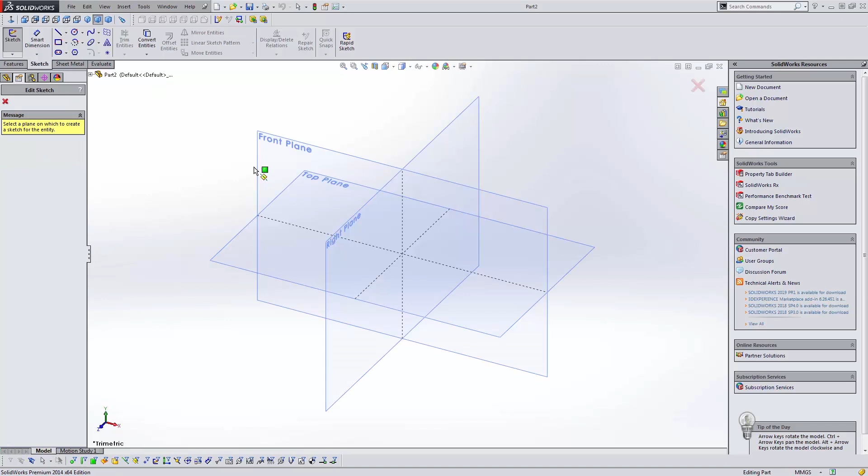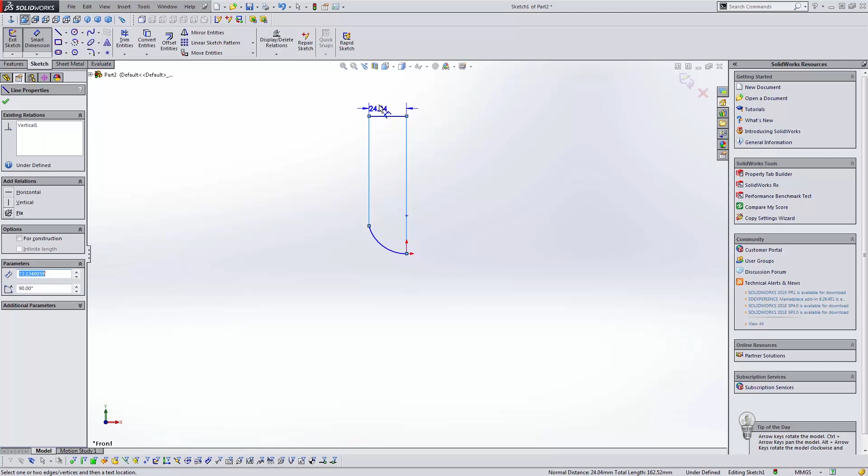I'm going to start with a sketch and just draw here a straight line up and down. This is going to be the axis it revolves about. I'll draw a line there, and that's going to be the center. So the diameter is 12 millimeters, so I need to go from here to here and put in 6, which is half of 12.

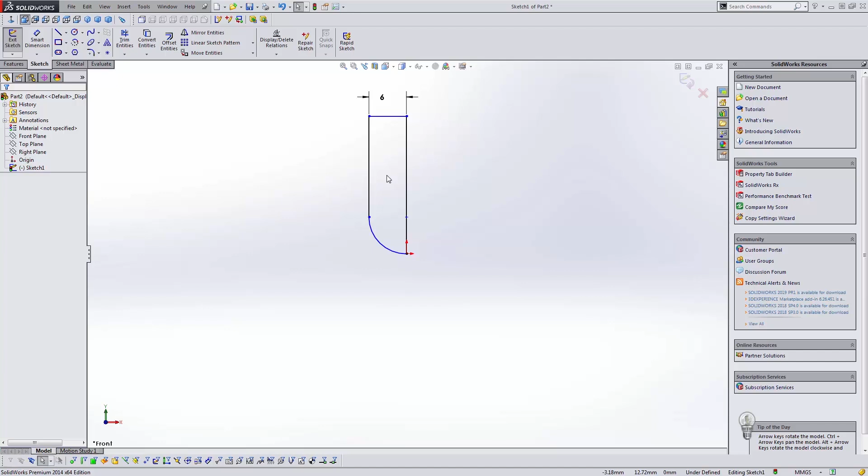I'm going to offset this line here, actually no, I'll use the shell tool to shell out that test tube. This arc's not going to be exactly right. I'm just visually using this in place when I design the other part so I can make sure they fit together. So you have your cross-sectional quarter view of this part, and after you draw your sketch, we'll just define this really quick so we don't have any blue in our sketches. Make sure everything's defined.

Exit the sketch, and we're going to choose Revolved Boss. While that sketch is highlighted, it's going to ask us what the axis of revolution is, or axis of rotation. We're going to pick this line here, and right when you pick that line, you can see already what it's going to do. It gives you some other options here, thin features. So if I want to make the thickness 1 millimeter, actually it's not going to work in this case because I would have to draw, actually I can delete off this line here.

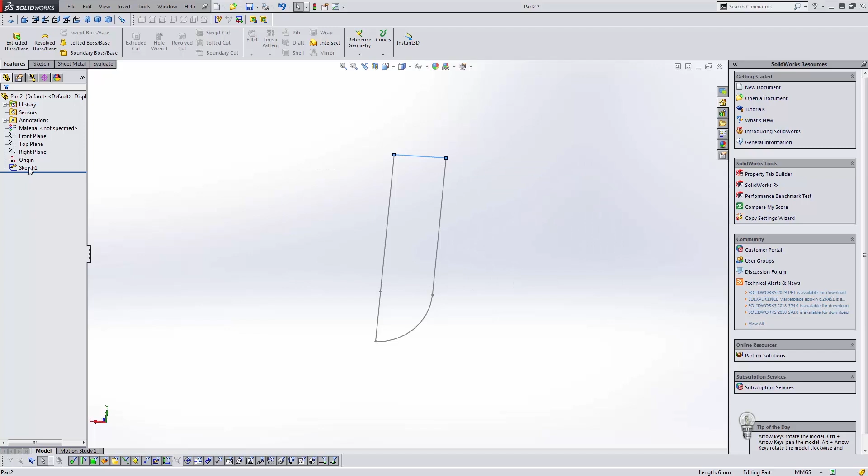Bring my errors over so you can see them. I actually don't want to delete the whole sketch. I want to come over here, edit the sketch, delete this feature off. I'm going to make this a construction line. So if you click on something, you can make it a construction line and it won't try to extrude it or use it as a feature. It's just there to hold the space for the dimension. So I called out the dimension on the construction line. It's holding that position and it won't interfere with the actual sketches that are going to do the extruding.

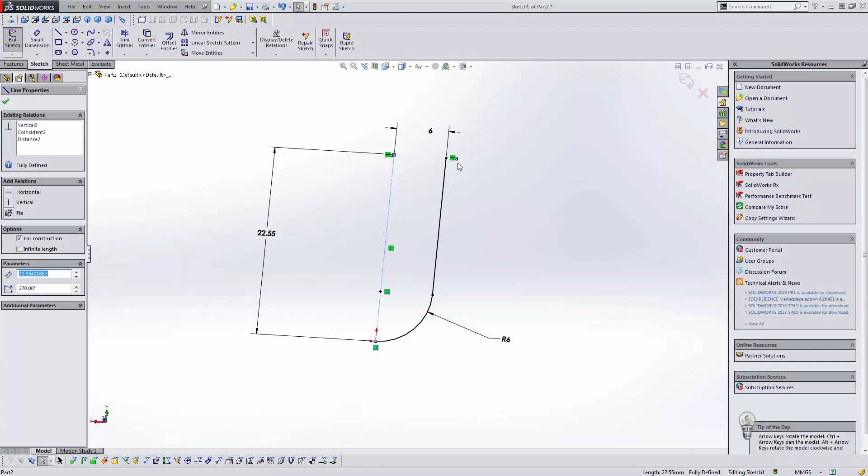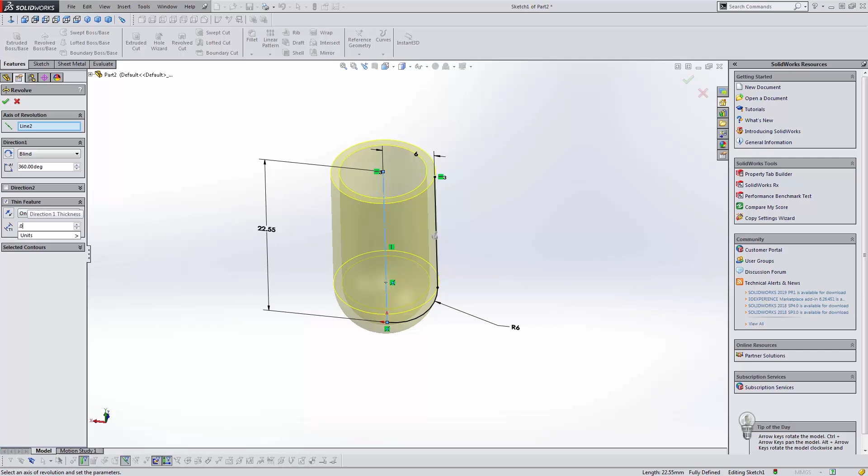So I'm going to do the revolve again. It says a sketch is currently open, meaning this is not closed. A non-thin revolution feature requires a closed sketch. Would you like the sketch to be automatically closed? I'm going to say no because I want it to be a thin feature. You can see here that I'm going to make the wall thickness 1 millimeter, or I can make it like 0.05 millimeters, just really thin. The glass is probably fairly thin on this test tube. So it's just another trick of skipping one step.

The other way we could have done it, and I'll show you that really quick, was closing out this sketch. Let me delete off this revolve, and we'll let it close it like it was trying to do. Sorry, I'm clicking around like a nut. Revolve sketch. Okay, it says it's open. This time we're going to hit yes. So when we hit yes, it's going to ask us what the revolution... I've got to close it off. Hold on. What are you doing, crazy sketch?

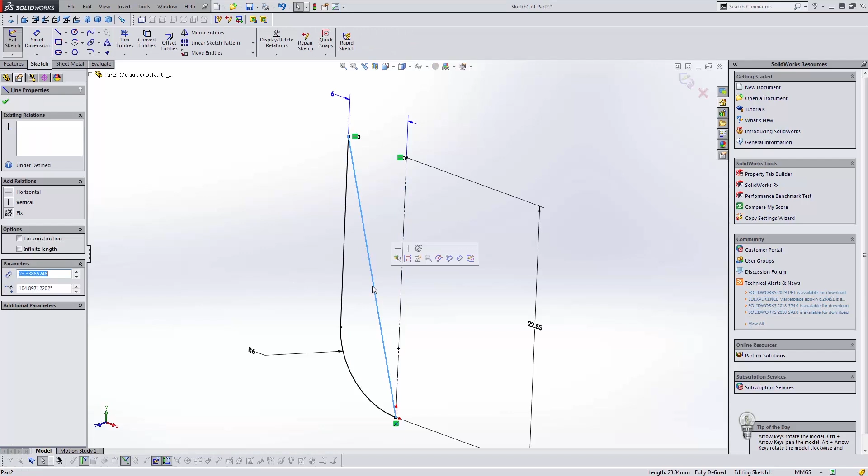Delete that. We're going to come over here, draw a line here. Now I'm going to do the same thing. Revolve, choose that sketch, hit yes, I'd like to close it. It's going to close that up and do the same thing there, except now we're going to have to shell this.

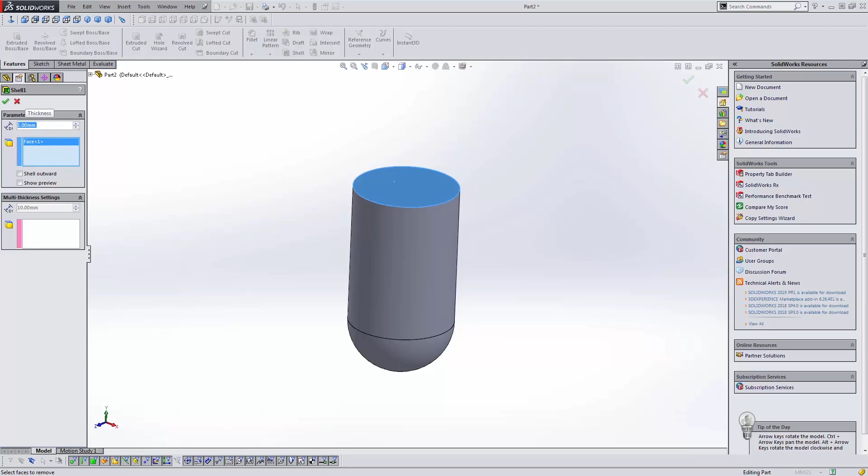So if you come up to your features, you go to shell, you're going to click on the top here, and you're going to say it's a millimeter shell thickness. And you're going to hit the checkbox, and there it is, or 0.5 millimeter. So you can right click on this feature, click on that little modification, and just do 0.5 millimeters.

So, you know, there's multiple ways to get to the final thing that you want to do in SolidWorks many a times. So we're going to save this, and we'll call it part 1 on the desktop. This is the worst place to save things. You can see I have all these junk folders and whatnot. So I'm just going to save it here, part 1, hit save.

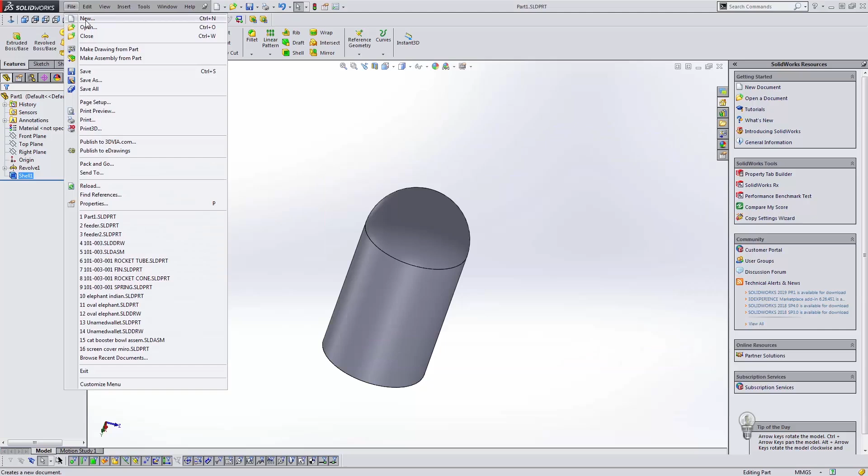So the next step is we're going to do a new part, and we're also going to use the Revolve again. And the trick to this is you always want to think of the object like a cross section of the object, and we're only going to draw half of it because we have to spin that shape around. And you don't have to draw in the center. Like if you want a hole in the center of this thing, you can start drawing over here out in space, and it'll revolve it around that and leave the center totally open.

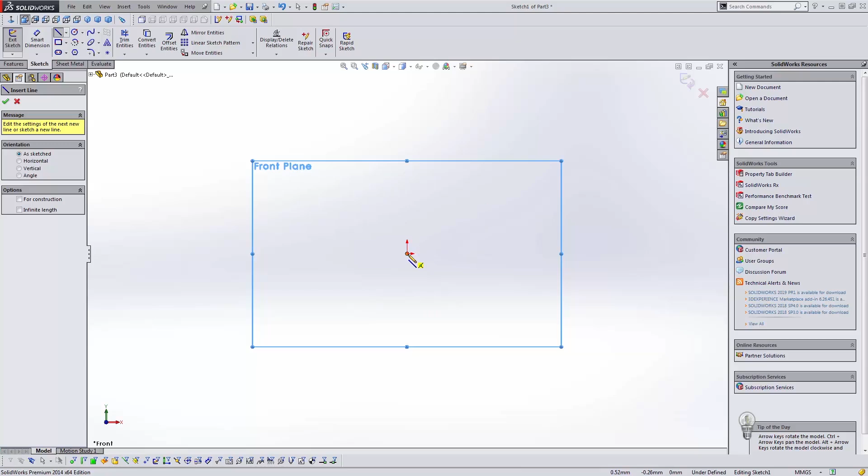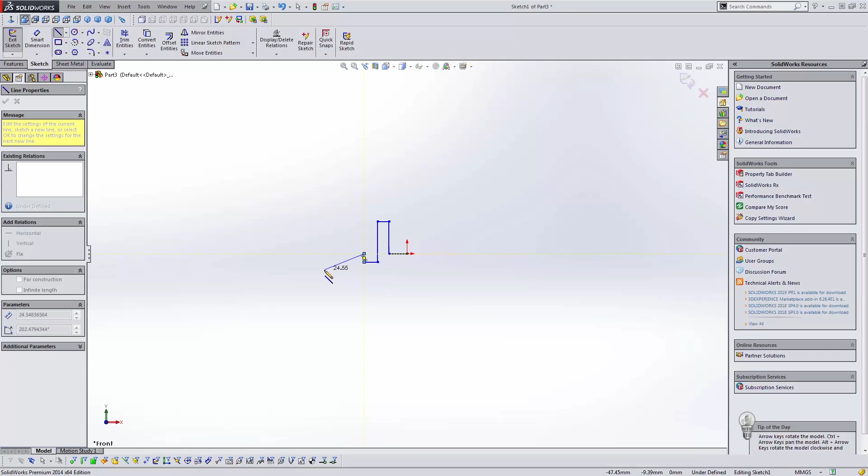But for this ant feeder, we want to make a hole for the test tube. We want to make a wall thickness for where that test tube is going to hold. We're going to also come down and make a little trough for the ants to come get whatever they put in here. And I want to make a little ramp for them to crawl up because I'm a nice guy and I don't want them to work too hard. And this whole thing will be closed off. So this is the base, and right there we're going to close that sketch.

So we're going to define some of these dimensions. So I have D as my dimensioning tool, and then it brings up the little dimensioning arrows, which is smart dimension. It also shows smart dimension D shortcut, but you can get to it up here. And there's also different dimensions if you want to do a horizontal dimension, a vertical dimension. Smart dimension just guesses for you. We're going to do smart dimension D. I'm going to click on it.

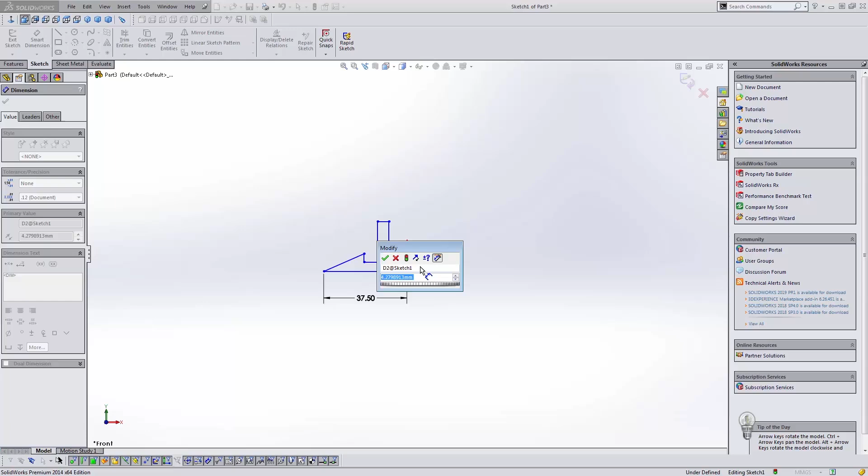Remember you're doing half of it. So if I want it to be like 50 millimeters total or 75 millimeters total, I'm going to use half of that. So I'll do like 75 divided by 2, make it about 3 inches wide. This thickness, I want to probably do about 1/8 of an inch. I'm designing in millimeters, but I can easily type in 1/8 and then inches there, and it'll convert it for me.

If I want to quit working in millimeters in this part, I can come down here and change the units to inches. It'll close off the sketch. You have to reopen it, and then now you're in inches. Sometimes it's easier to work in inches, depending on if you're used to it. I can work in both, so I'm used to working in either.

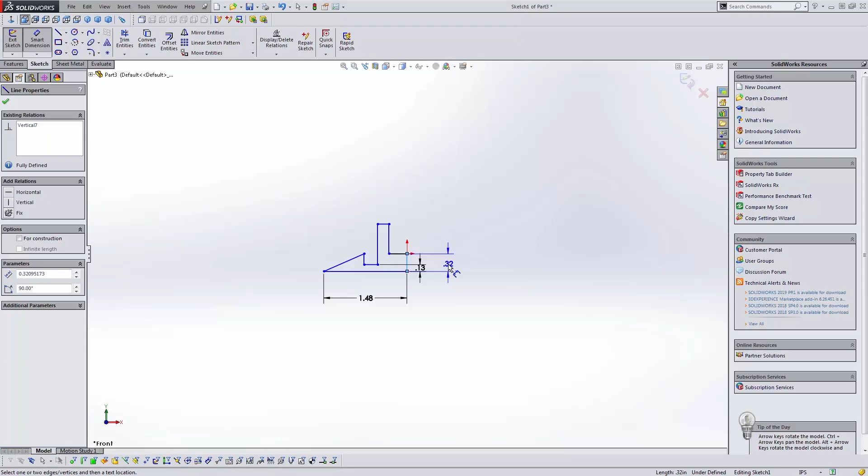That's an amazing skill to have. You guys should get that skill set.

All right, there we go. So I'm gonna make that 3/8 thick. This is where the test tube goes in, so it needs to be 6 millimeters to give me a 12 millimeter diameter. And we'll give it a little bit of play in there. So I'm going to do that in thousandths because I think tolerance is better in thousandths. So I'm going to give it about 5 thousandths total, about 2.5 thousandths on each side. So I just opened this up a little bit so that test tube could fit in there easier.

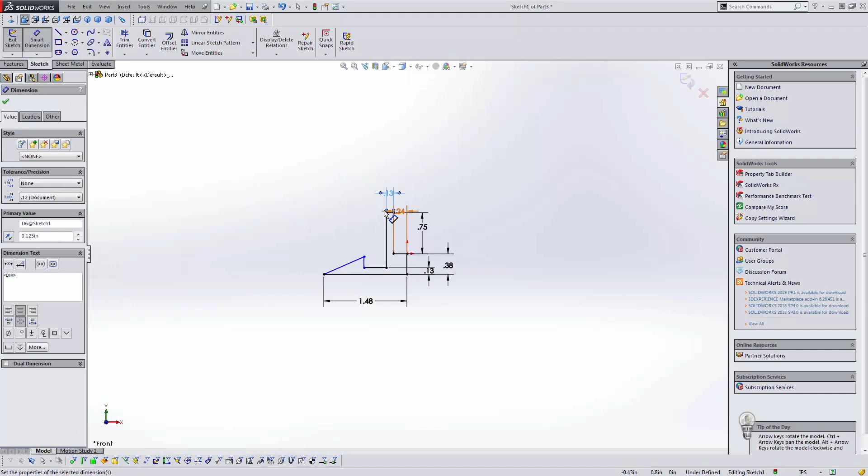I want about maybe 3/4 of an inch grab on that test tube. So that's the height there. And the wall thickness, maybe like 0.125. It doesn't need to be that thick. It'll be fairly strong. And also the trough, I want that maybe about 1/2 inch.

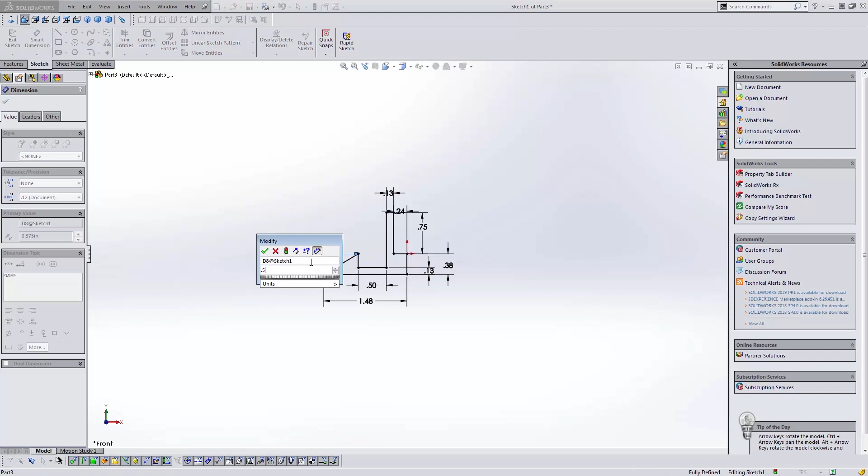And this final dimension, I want this height to be higher than this lowest point because I'm going to put a little slot here, and you guys will see that later. But I want this height to be a little higher than that. Actually, probably I'm going to make this fairly high so there's no risk of the liquids falling out.

And thinking about this real quick, I don't want the ants to fall in here and drown, because right now this dimension, oops, wrong button, this dimension is 3/8 of an inch. That's kind of deep, so I'll probably want to slope this up so I can turn off that diagonal. I can't rotate this guy.

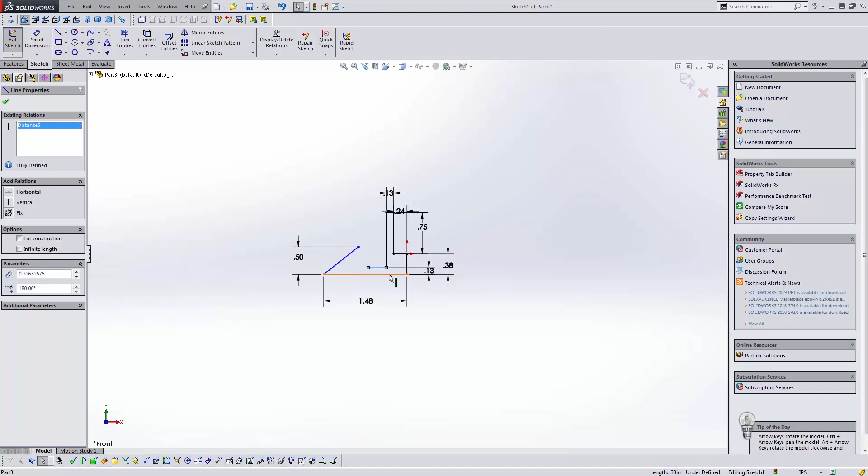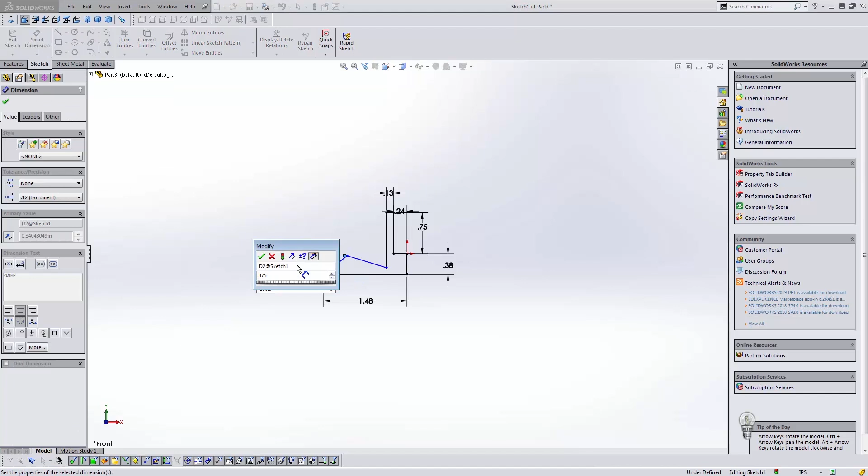Locked somewhere. So one of my constraints is set here. My distance is set, so it won't let me change that because the line to that is set to that. So I'm going to delete that distance relationship. Now I can move this, and I'm going to slope this up. So if the ants fall down, I'm going to do it like to there. I can trim this. It's going to give me some errors. I'm just going to put my new dimensions in there. See if that was a good idea here in a minute.

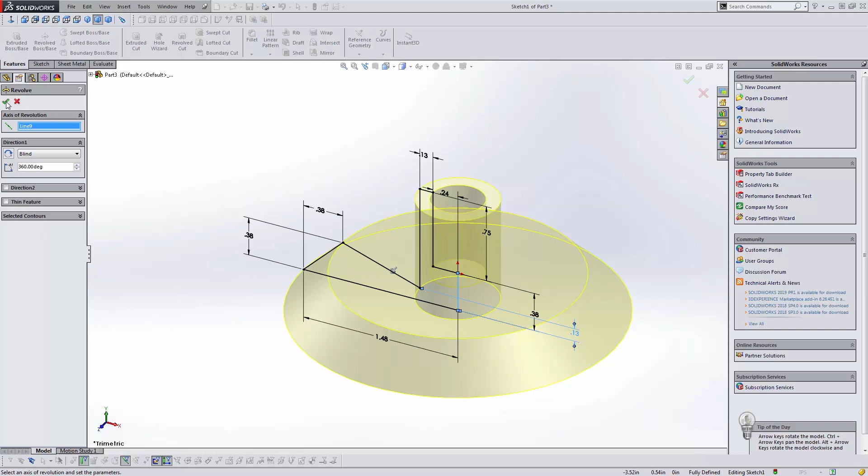So what we're going to do is use the Revolve. And it's going to ask me what the axis of revolution is. I'm going to click this, and it's going to create this base here. I'm going to hit the check mark, and it basically revolves around that center. This will be the feeding area. Now what I need to do is create slots in here that will feed the liquid down to here.

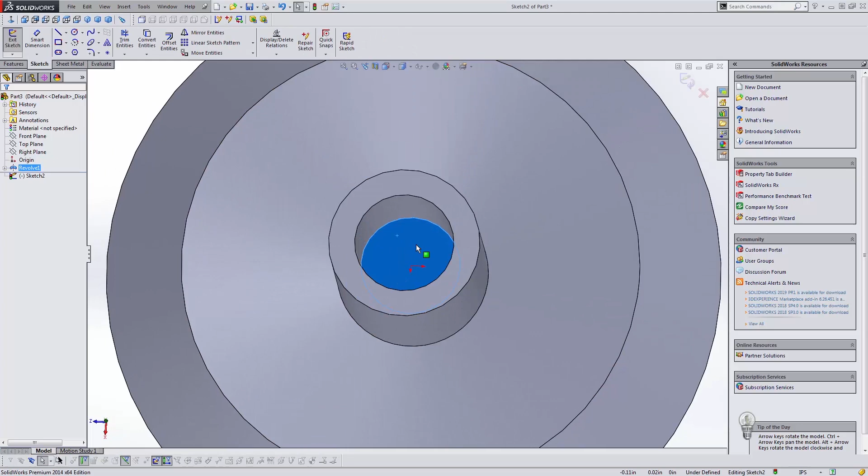There's a lot of different ways of doing this. I think what I'm going to do for this video is a fairly simple method of just picking the plane here and cutting out a slot down to here. So if I do an extruded cut on this plane, I'm going to sketch, and I'll start in the center, and I'll go out to this box, and I'll also draw a circle around here, and I'll also draw another box.

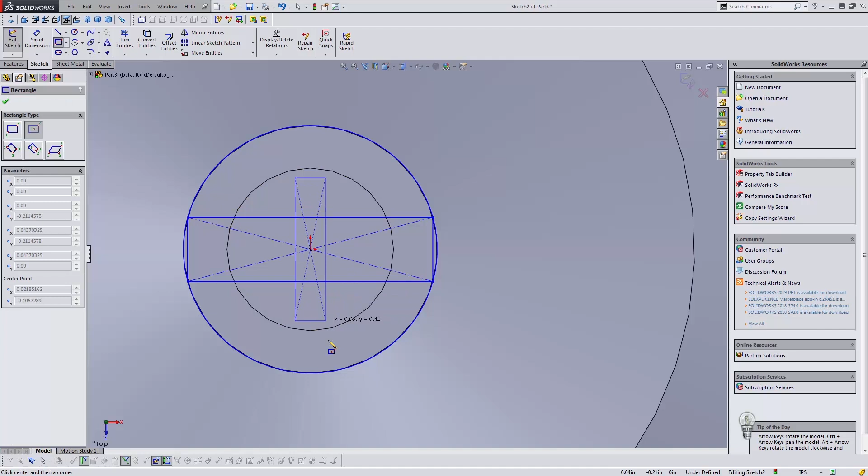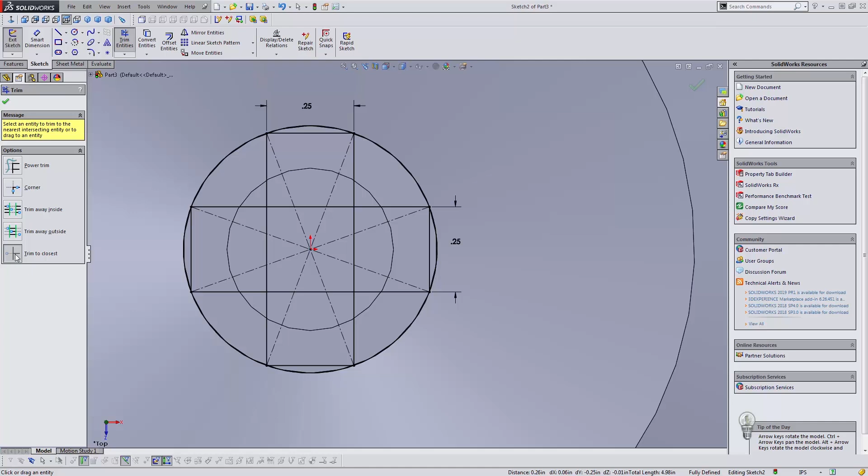I know this looks like chaos, but what we're going to do now is start defining some things. So this is going to be 1/4 inch wide. This is going to be 1/4 inch wide. This circle we want concentric with this one. Sorry, co-radial, so it's going to be on the same radius. And then if I hit the T key, I have trim set up. I like trim to closest. Power trim, you can draw the line and it'll delete certain things. Trim to closest, you can click the items you don't want. So I'm going to trim out everything.

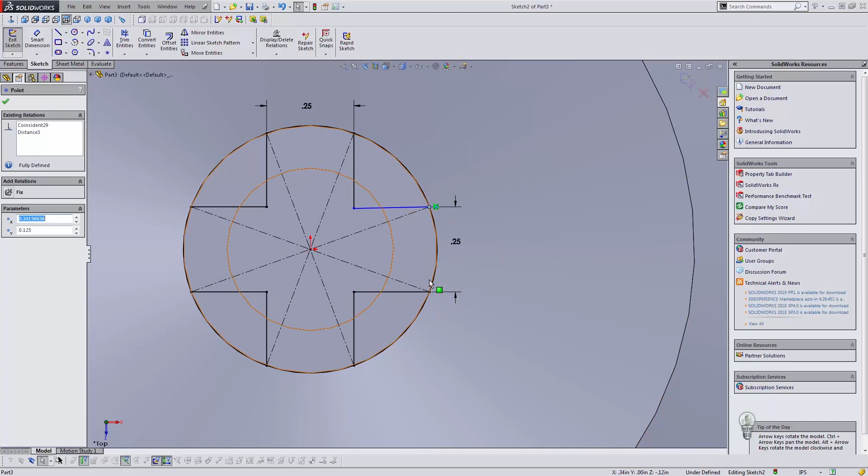Basically. So when I extrude this out, oh, I trimmed a dimension. See, my dimensions got lost because I trimmed it. I need to actually dimension these points. I'm getting an error. Oh, because it's defined over here. Hold on. So I always move things and see where things are going nuts, and that helps you see where you need to fix your issues. And there should be one more problem here. I'll just make this vertical to that, and I'll make this horizontal to that, and there we go.

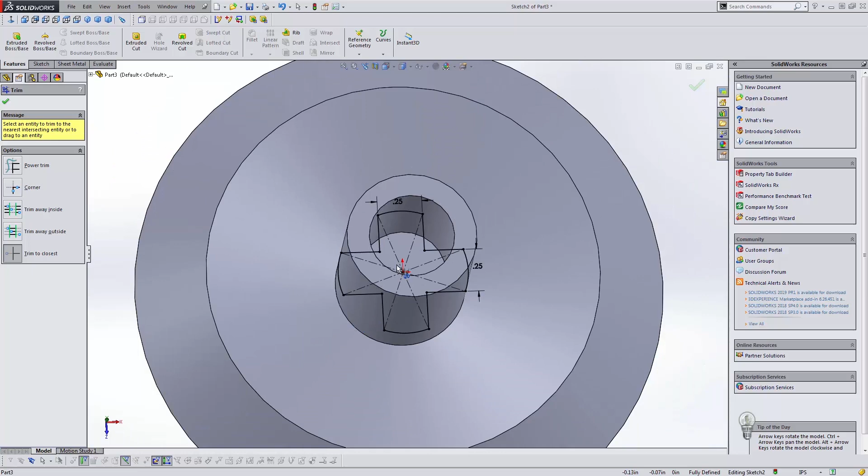All right, so we're going to extrude that, and it's saying it's an open sketch, so what is going on here. So I got an open sketch. There it is. This guy, all these trouble points. So that's what I want right there. So I want to extrude this down, and I'm going to go up to a vertex, I'm sorry, up to a surface,

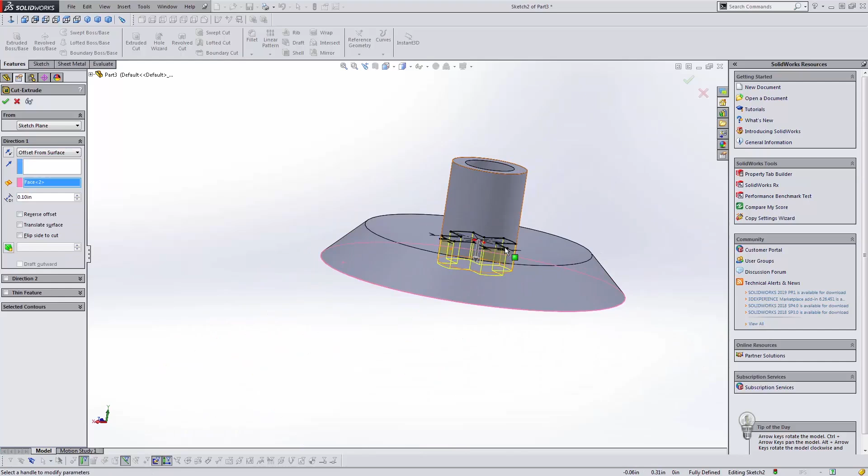and I don't know if it'll let me pick that. No, it won't, so I'm going to offset it from the base surface, and I'm going to go 0.125 because I know that's the thickness of the base, and there you go. So when you plug in that test tube, it'll stop here on this surface, and it'll let the liquid drain into this pond.

I probably want to make that not as deep. So really what I need to do is make the test tube go further down. So I'll go like 0.25.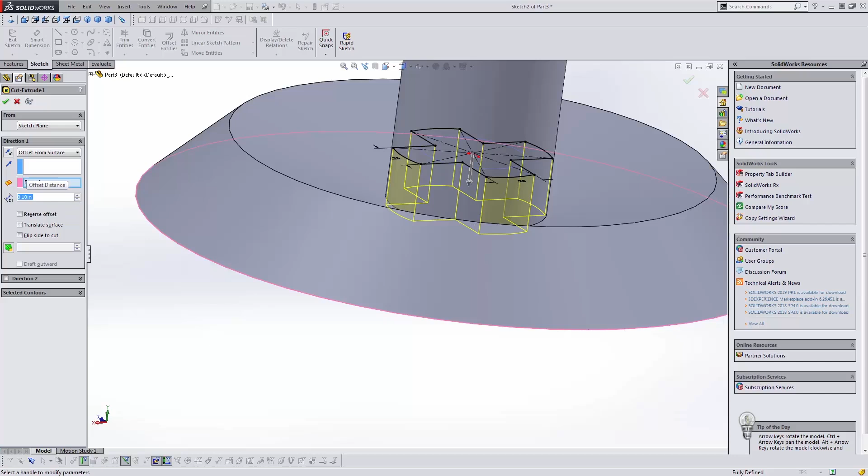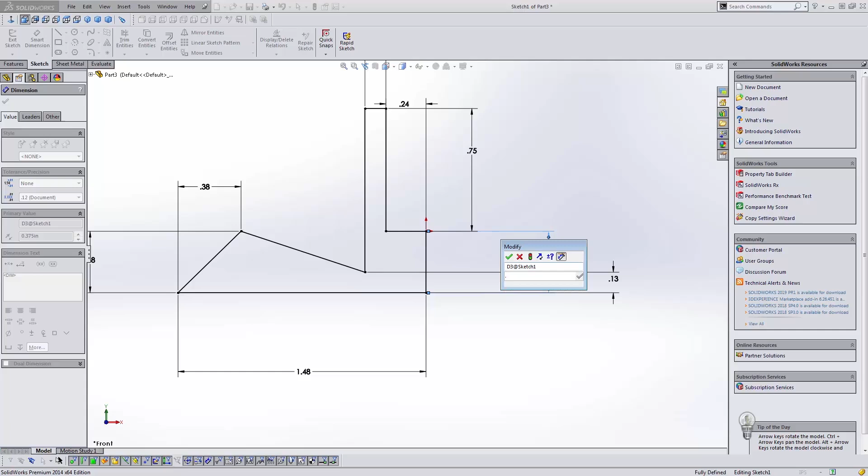And I want to move this to this point, and to do that I need to extrude this original revolve. I need to go further down. So I'll come back to here and I'll look at this, and I need to go down basically to the base. I'll give myself a little room so that liquid can come out. Oh, error. So let's edit this sketch, plane sketch.

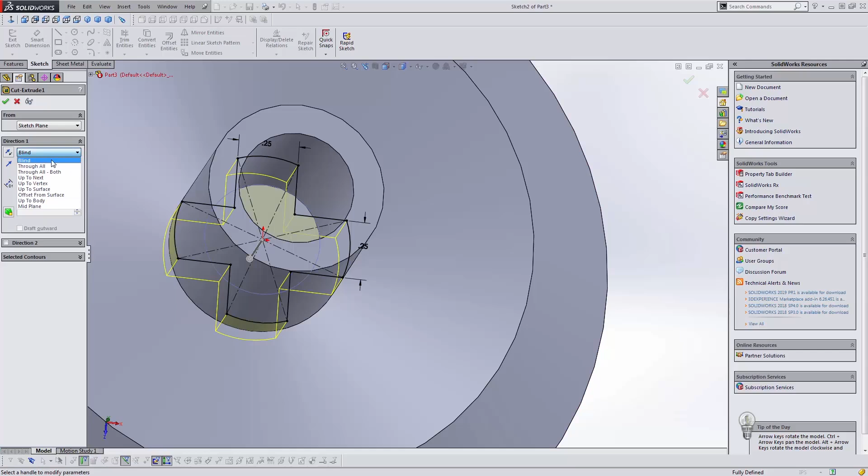So if we edit this, kind of see what's going on. Okay, I don't know why it's erroring out. The end face cannot be determined. Okay, it's because I deleted the face that it was referencing. So I want to offset from surface, and I want to pick the base surface again. And I want to offset, I want this sketch. So where are you at there, brother? Oh, okay, I was going too far. There wasn't enough. There we go.

Man, I'm not on it tonight. I'm sorry, guys.

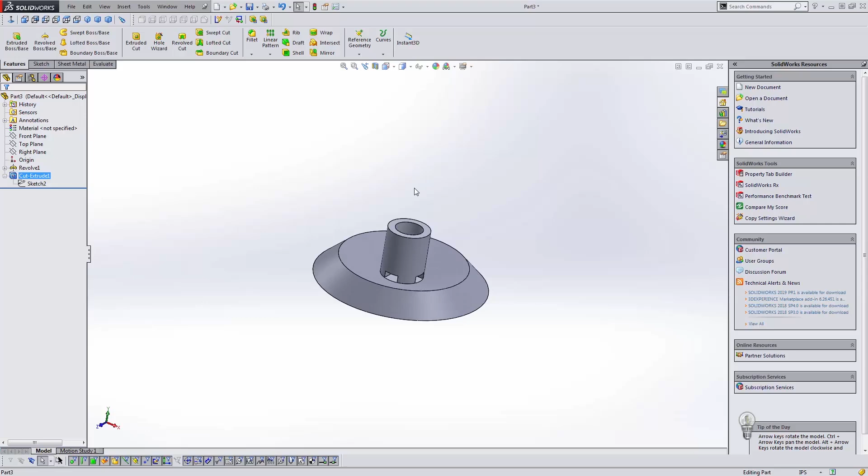There we go. Much better. So what'll happen is your test tube will plug into there, which we'll see in 1 second. And it'll kind of fill up this bowl and allow the ants to feed. So I'm going to save this as part 3. And I have part 1 open. I have part 3 open. So now I'm going to go to new and make an assembly. I'm going to bring in part 1, bring in part 3.

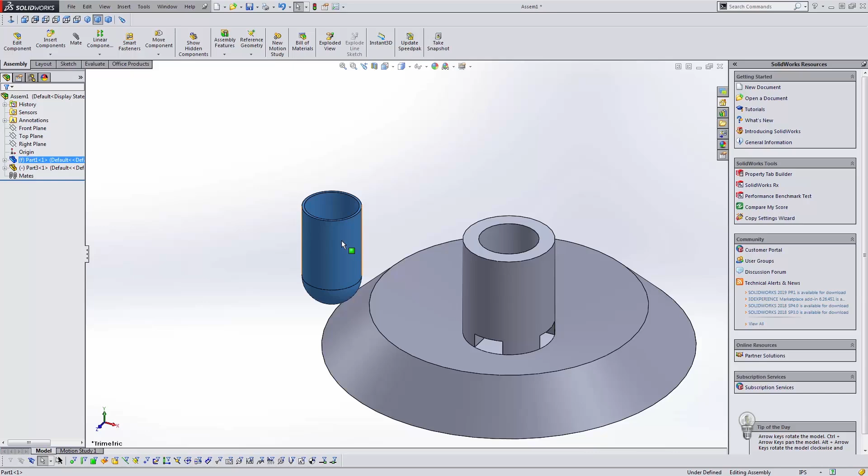And this will kind of cover assemblies really quickly. When you bring in your first part, it's always fixed, meaning you can't move it. It's locked. So to unlock it, you can right click and float it. And now it's free to spin and be moved. So left click drag does that, right click drag spins it around. Same with this, they're both free. What I usually do is I'll start with one of my objects, usually kind of like the main object of my assembly, and work around that. So I like to fix this guy.

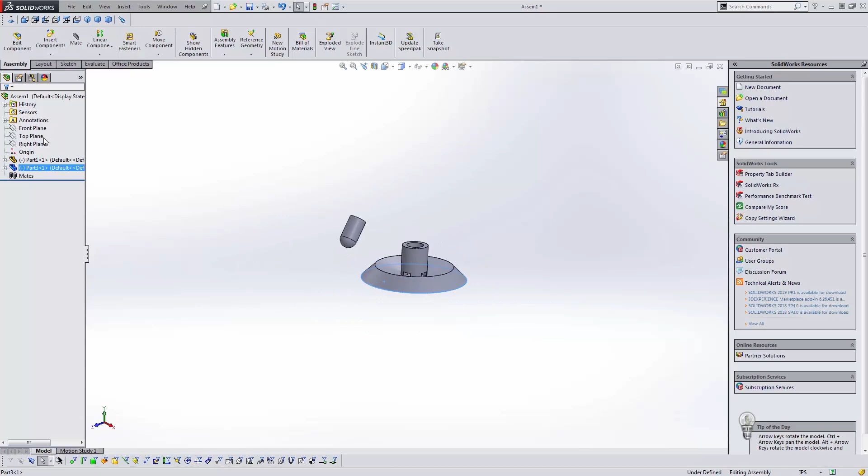I want to fix that to the top plane, so I pick this surface and hit M for mate. You can also get the mates up here. There's the mate button, and in the mate options you have all kinds of different tools you can use, including advanced mates, mechanical mates. Most of the stuff you'll be doing, you can just click the surface, click the next surface. It's going to guess what you want. In this case it didn't because I was in advanced mates, but I'll show you on the next one.

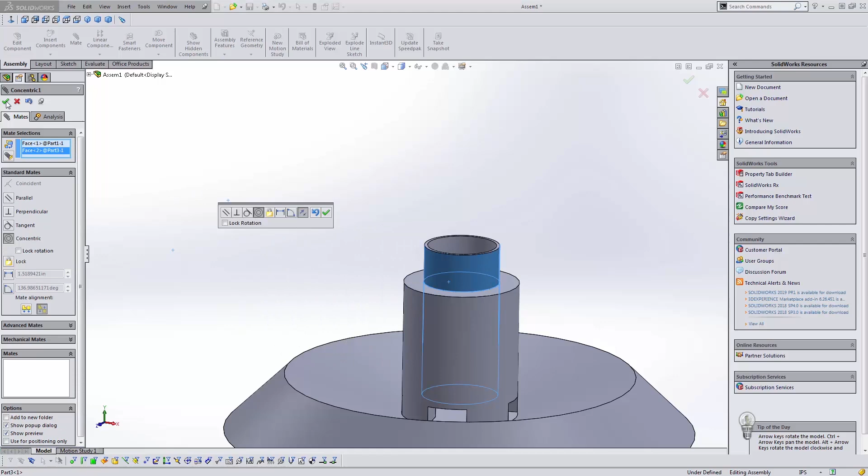So I did that, it's concentric, but I want to flip it. So see how it made it that way. I actually want it that way. And then I'm going to click the check mark. And what's cool in assembly is I can double click this and make this longer right here. So if I want to do 1.5 inches, I can hit that, hit rebuild up here, and it makes it 1.5 inches long. You can see this is still moving in space, so I want to lock that down.

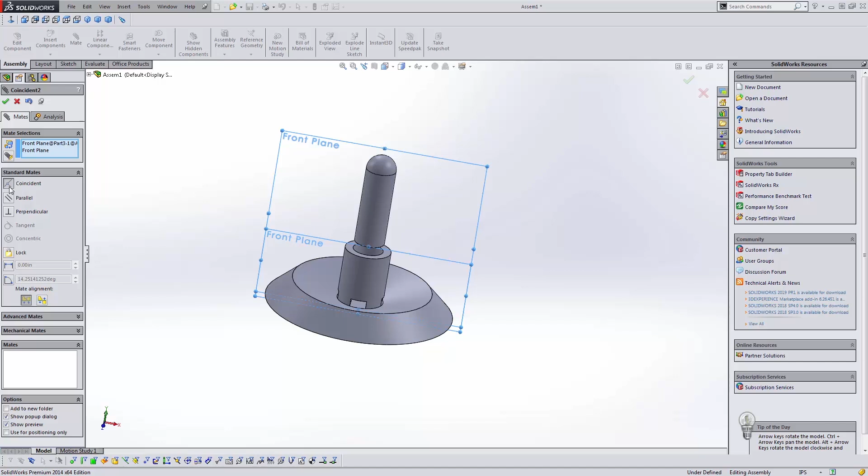So I'm going to pick front plane, hold control, left click on it, and then left click on front plane up here. I'm going to mate those together, and you can see it moved over there, coincident. And then the same thing, now I'm locked in space on the top here and the front, but the right plane is still free to move. So I'm going to left click that, hold control, left click the right plane here, mate, or I have the M key shortcutted to mate.

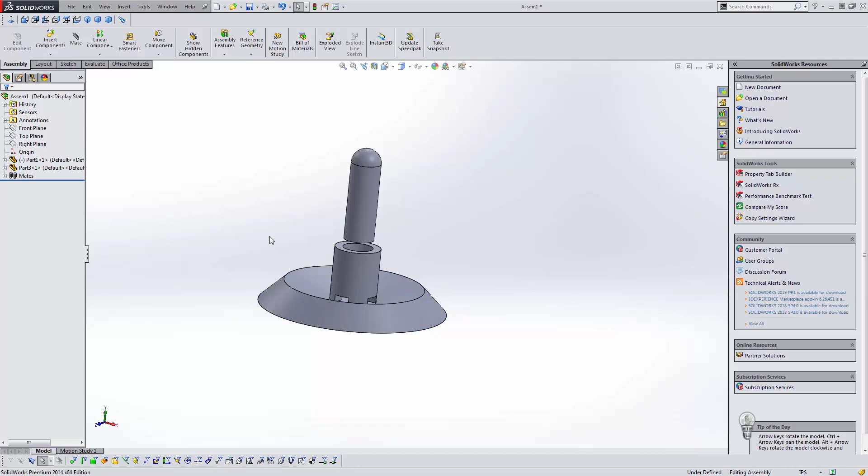So you'll also see now that this component doesn't have this parentheses dash, which means it's not defined. Basically, it's free floating and it's not fully defined in space. Like this right now, I can still move up and down. I can actually spin this. You can't really see in this item, but it's spinning. So what I need to do is I'm going to click this face. Click that face. I'm going to come down here, click the surface it's going to sit on. I'm holding control to hold both faces, and then hit M key and it mates it there.

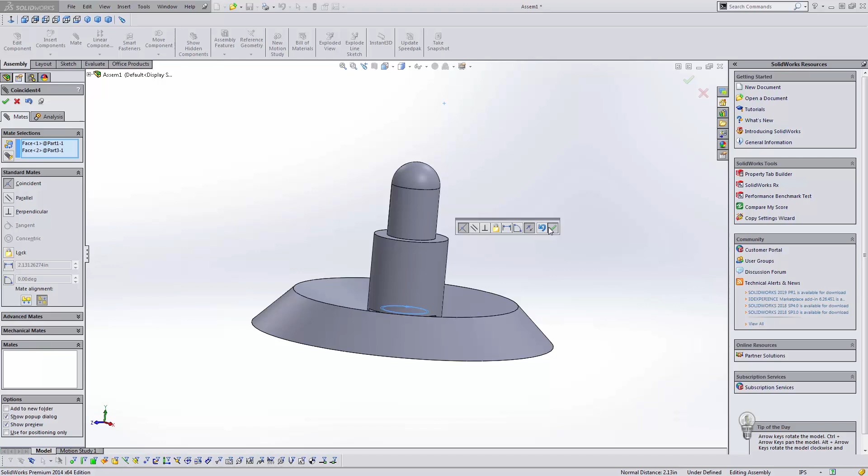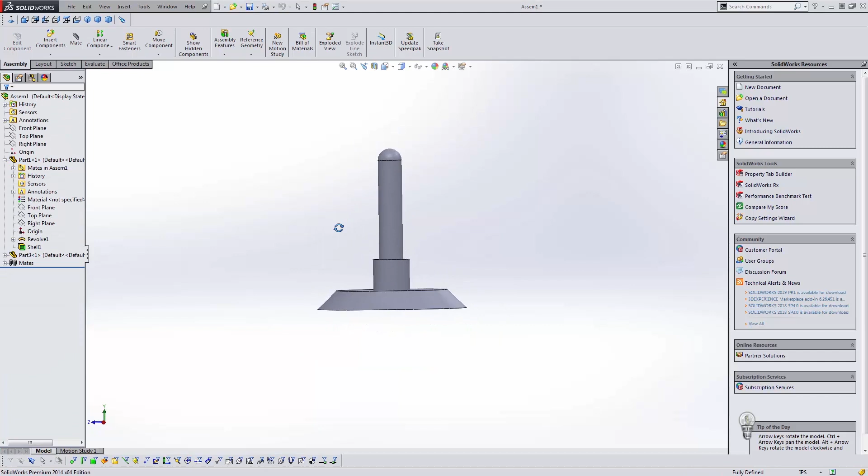And it's still going to be not fully defined because it's a cylindrical object and it's spinning. So if I come in here and choose this front face on it, you can see it highlights it, and just choose this front face here, hit mate, it's going to rotate that to sync them up. And that's basically it. This is probably more like 3 inches. That's going to be the new ant farm feeder I'm going to put on the website. I'll probably add a few things like cleaning up some of the edges on this object, but you can check it out.